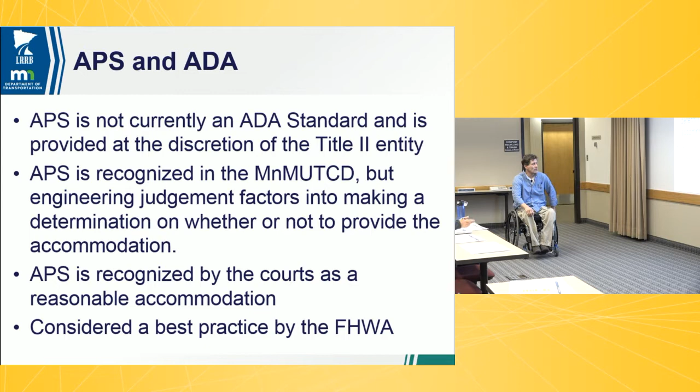It's not required, you don't have to do it. But APS is recognized by the courts as a reasonable accommodation, and it's considered a best practice by the FHWA. And the Access Board, who makes the regulations, the standards, their position demonstrates APS is viewed as a reasonable accommodation for blind and low vision users, and APS will be included in the final rule for public right-of-way.

So there's a few things going on there - actually MnDOT had a small complaint filed against us, but it did go to Washington Department of Justice and the St. Paul FHWA, and the basis of that was we were not doing APS. So visually impaired users rightfully said, you know, I don't know what this signal is telling me. It's not communicating the same language, the same information, so it's not accessible.

And, you know, what could we say? It's a very hard case to say it's not, or say that it is accessible. So it was determined that we weren't going to win that. So part of the outcome of that was we just basically said we are going to make APS a standard as we do improvements. And actually that's where my position started in my unit. We started amping up our engineering side of accessibility, and this was in 2010.

So also, where we said APS will include it in the final rule for public right-of-way, the Pro is actually a new version of PROWAG. It's public right-of-way. And they've got language currently in PROWAG that says that you will need to upgrade APS as something as simple as a timing change, which would be a big difference. You're not even doing construction, you're just doing signal timing change, and you do have to do APS. But when that switch gets flipped, that can be very drastic.

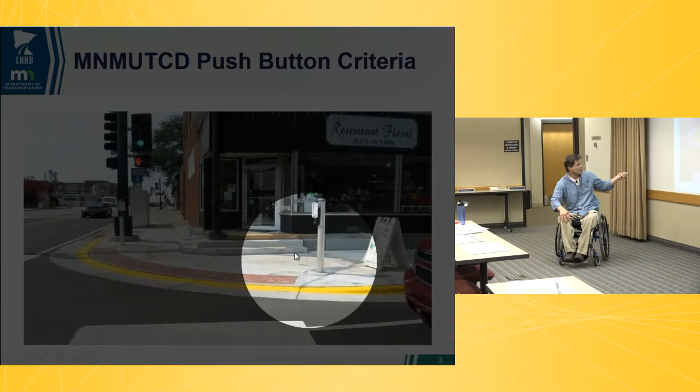So the first slide we have is a typical type intersection, with APS installation. It's got two push buttons on it because there's two crossings. So you always want to have this outside push button on the outside edge of the crosswalk here. Again, this one over here is on the outside edge as well, as you can see. So I use my hands here. But it's always off this outside edge. And so there's one push button for each crosswalk.

The push buttons always need to be adjacent to a landing, so users in chairs can be on that relatively flat surface and activate the push button. The push button also needs to be 42 inches high, and that's actually just a MUTCD standard that's been there for quite a while. It's a traffic standard.

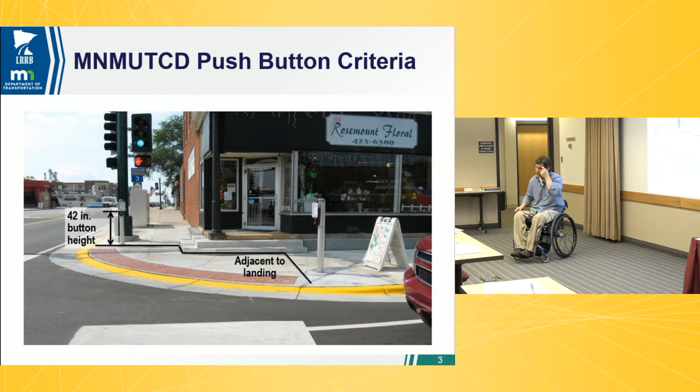ADA actually gives more flexibility, saying it can be anywhere from 15 to 48 inches. But in this case, consistency is important in a lot of things, and our standard is 42 inches from our traffic folks. Also, you need a 10-foot minimum button separation.

That is so users who are coming up to the intersection have the locator tones. These push buttons beep 24/7 just in the vicinity of the quadrant itself, so visually impaired users coming up here, with one crosswalk for this leg and one crosswalk for that leg, can use that 10-foot distinction to tell which button is for which crosswalk.

Having two push buttons on the same pole is very confusing for users. What is this one pointing me here? Where is this one supposed to be pointing me? So consistency is really important, and we'll keep hitting on that.

Also, the push button needs to be no more than 5 foot offset from the edge of crosswalk. That's because some users do depart from these push buttons, and if you're located away from the crosswalk and depart from the push button, you could end up in the way of those queued vehicles.

Users use them differently, but some users will depart from the button and even line themselves up perpendicular with the sign, so when the audible message comes, that's where they're going to go. Other users will just leave from the tapers or the domes, but for users that leave from the sign, it's really important to have that location set.

I've been talking about visually impaired users quite a bit, but there's also another function to the APS, and that's the vibrotactile push button feature. That is for users who are both deaf and blind. They're not seeing the cues or even hearing the speaker, but they're sitting there at this push button waiting for it to vibrate, and when it vibrates, they will start their crossing and go across the roadway.

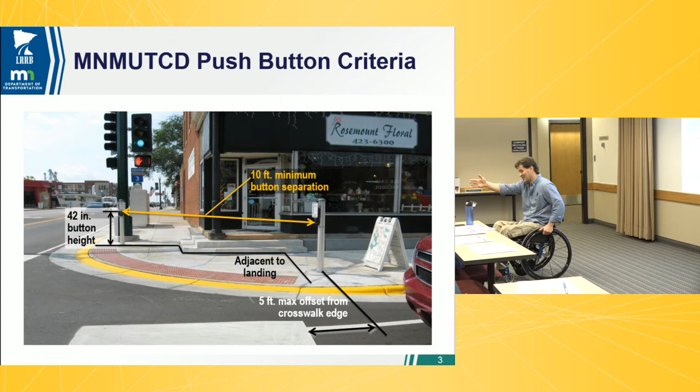I would still say that is courageous, crossing some of our high-speed roadways, but users are using them this way. So it's very important that we design these things correctly. It takes a lot of faith, because that's what they're saying. You've got to design them right.

You've got to build them right. They've got to be maintained right. So they're counting on us as individuals to make that happen. So the details do matter.

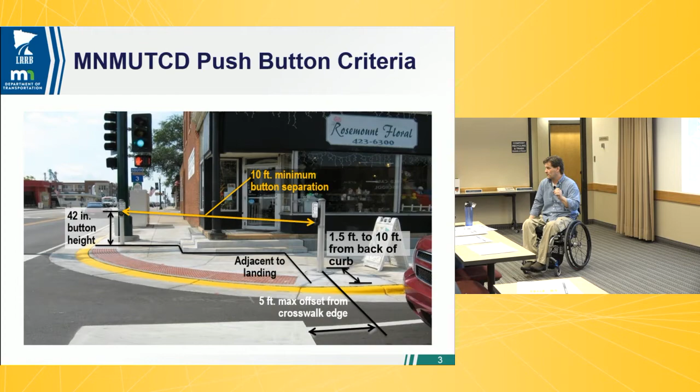Then finally there's the push button setback. It's a minimum of 1.5 foot from back of curb. The MUTCD talks about it should be up to 6 feet from back of curb, with exceptions up to 10. But MnDOT is using that full exception quite often because we're in a snow and ice climate, so we're trying to get this push button outside of the middle of our walks for maintenance purposes. So we're going 1.5 to 10 feet maximum setback from the back of curb.

There are other additional MnDOT requirements. Those were all MUTCD requirements, but at MnDOT, whenever it's on an individual push button station, we want that to be a minimum of 4 foot from the back of curb. That's simply for knockdowns, overturning vehicles, snow plows — we don't want those to get knocked down. So we want them to be at least 4 foot.

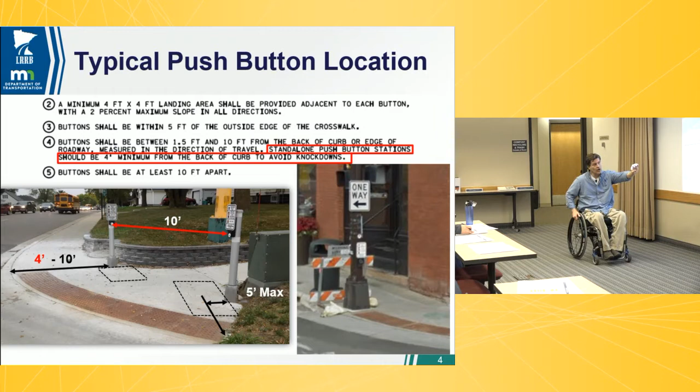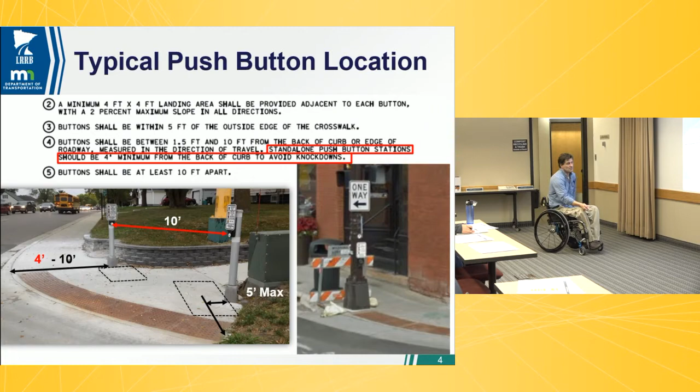When you do need to put a push button on the pole, as in the picture on the right, that is fine to put it right there. This one's actually compliant — it's probably 1.5 foot from the back of curb, and that pole is not going to get knocked over, so that works well. This is a tight corner; you weren't going to be able to do anything else in that area with that minimal space. So using the push button on the pole is fine.

So now that's a lot of criteria, right?

I'm really limited where I'm going to put these things, and I want to meet all these standards, which we definitely want to do. But also, we don't want these push buttons to be in the middle of our sidewalk. So we've got areas with 2 grass boulevards. Whenever you can get boulevards for ADA, do it. It makes it so much easier. There are so many benefits - the design and construction is better, and the pedestrian environment is better. So boulevards are huge.

So when we have boulevards, we generally are able to favor our push buttons towards the front of walk, in that 6 foot sweet spot we talked about earlier. You can have a landing, a ramp, and a landing, and the push button all in line with this front edge of walk, which actually works real well. Same thing over on the right side, in line with the front of the walk. It's a tough push there, but it works well in that type of situation.

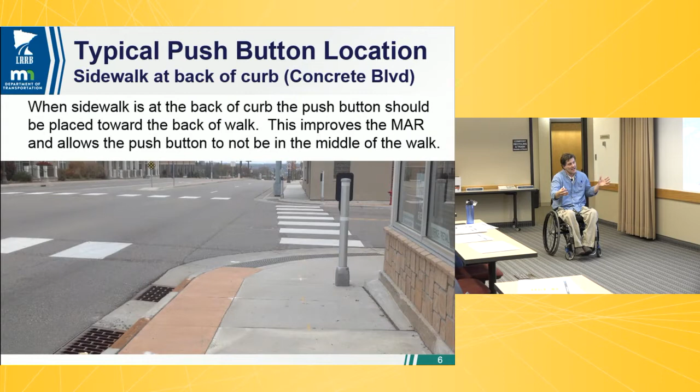Now, when you've got a full width sidewalk, we generally favor the buttons towards the back of walk, just so the buttons aren't in the middle of the way. If we put the push button, say, right here in the middle, it can block things up. So we're trying to avoid that.

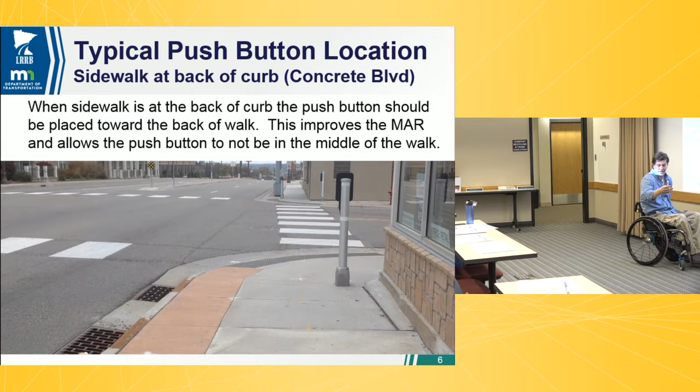Every intersection, the geometry is a little bit different. Here we have 2 individual ramps, which works great. But on the right side, we've got a boulevard coming in, so we could favor the front side of that walk with the push button at, say, 6 feet back. This side on the left is a full width sidewalk, so we align the push button with the back of walk. So both fully meet standards, and they're out of the way of the walk.

The additional benefit of this is when you have this front-to-back stagger, that actually helps you get that minimum 10-foot separation, which helps a lot sometimes. If this was pushed more towards the back of walk, you'd have to widen it out to get that 10 foot of separation. So there's a lot of little tricks you can do, just knowing how to fit the criteria in.

So we'll talk about maintenance access routes.

Question? Yes, quick question before we move on to maintenance. I was under the understanding that in addition to the push button location and that 10 feet separation, the push button is actually directed in the direction that the crosswalk goes, so they can line up with the direction of the push button.

It does, yes. You either didn't mention it, or I didn't mention it. So yes, the users are getting the exact directionality out of this. It's lining up with where they're supposed to go, and that's what I was talking about - square it up with your arm, or using your palm for the vibrotactile feature, and that is guiding you exactly where you're going on the other side. Of all the design elements in the quadrant, the push button would be best for giving directional location of the quadrant. Yes, that signals it. It's really hard to make the ramps directional, I'll show you that, but the push button is a great technique for giving directionality for visually impaired users.

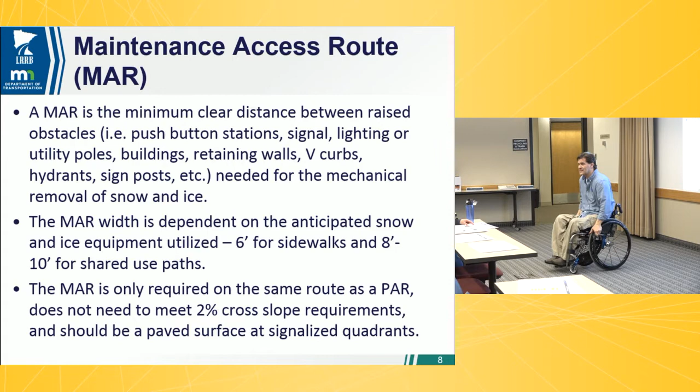Any questions on the PAR and the MAR?

Okay, so here shows a picture of - we definitely have that 6 foot clear from the edge of the T-base to the face of the building, so that's what we want. Here's the other thing that MnDOT added: if at all possible, we want 2 foot back from the top of ramp to put the push button.

Now, all PROWAG says is you need to be adjacent to a landing. So I can have that push button at the front of the landing, the middle of the landing, or the back of the landing. There's certain areas that are better for usability. Right in the middle is what I shoot for.

So, for example, I'm a para and I've got pretty good strength, but I do have balance issues. So as I start reaching forward here to hit this push button at the front of the landing, I'm holding myself up with my hand here. And if this hand isn't here and I start reaching farther forward, I basically fall over because I don't have use of my legs. You guys are all using your legs to sit up right now - you might not know it, but that's what's holding you up. If you don't have those, you'd have a lot of that balance issues.

And again, there's other people with higher impairments than me that have a hard time even reaching forward to where our button is. So having that centered is a very big usability thing.

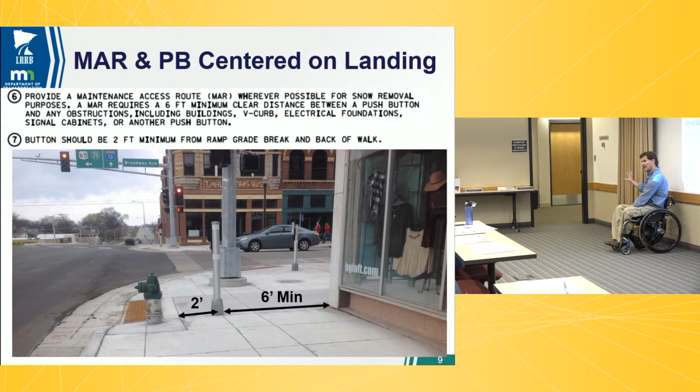Also, as far as if the button - let's say this carpet is the back of walk, and that button is back here, right at the back of the walk - much harder reach here. I'm torquing around pretty good, and I've got a lot of fusion going on here, so that's a hard reach. So again, if we could just add 2 more foot of sidewalk behind that, where this button would line up again and be centered on that landing, much better from a usability standpoint.

So yes, that's MnDOT's 2 additions. And something does have to give, we get that. So when push comes to shove, we're going to use the maintenance access route over centering it on the landing. But again, we can only have it 0.75 feet - I'll show you that in a minute because we have an integral base - so it's got to be that 9 inches minimum back from a landing.

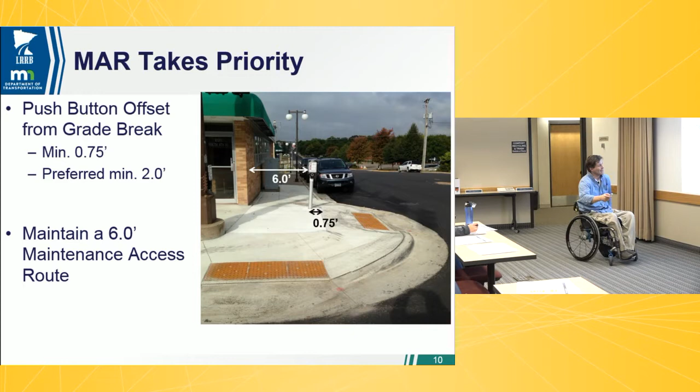I can just slide this push button back out of the way and it's easy, still meets standards, so everyone's good, right? No, not what we wanted. The business folks in the community said, what are you doing? You just ruined our sidewalk. Our project team said, well, it's compliant. Does that matter to all the other users? That's right in the middle of the walk. You talk about maintenance, not going to happen. Two people walking down the sidewalk, it's a hazard, or a kid on a bike.

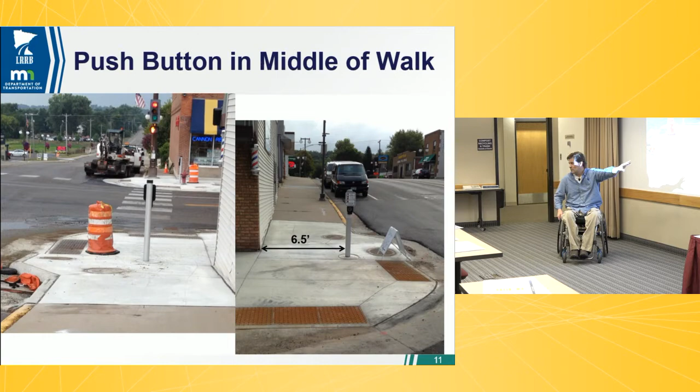So actually, we went back and had the contractor put the push button where it was supposed to be. He dug around the conduits, got that 6 foot clear, got a wide 6 foot pedestrian access route. So you got your maintenance access route, you got a wider PAR, more usable, still meets standards. Both of these are compliant, but obviously one gets you better results than the other. So don't always dial down to the minimums.

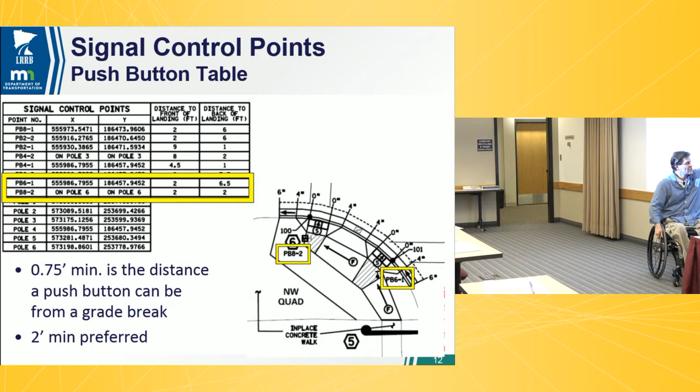So we've talked about how to put all the plans, the quadrants together. Now we want to show how it goes into a plan set. This is one of your example sheets. You've got a plan sheet for this, and basically this talks about where to put the push buttons on the landing. The one on the right has a 2 foot setback and 6.5 foot behind it. That's what our landing table talks about: 2 foot to the front, 6.5 foot to the back of the landing. We're describing this for a contractor so he knows how to build these landings.

I should have backed out even farther, because before we used to have signal plans that were basically schematics, and it was just like field people, go locate your signal components wherever it is. It rarely worked out with ADA. So we're starting to detail these together, and we've got the same push button nomenclature for that as a signal phasing.

We've got XY coordinates for the new signal components, because there's always a question - if MnDOT says mark it here, someone marks it somewhere else. We want to have that record of where it is, and we want to have it thought out where that pole should be. There's an example of where it says 'on pole' for an existing pole - we're not giving coordinates for that, because that's obviously going to stay where it is. But we are also describing all those XY coordinates in this landing table.

That's what I was getting at with push button PB6-1. You can see there, you've got the 2 foot from the front of the landing, 6.5 foot to the back, so you get that 6 foot maintenance access route, so you're good. The push button on the left, PB8-2, is at the end of the sidewalk, so just 2 foot to the front, 2 foot to the back, centered on a landing - very understandable.

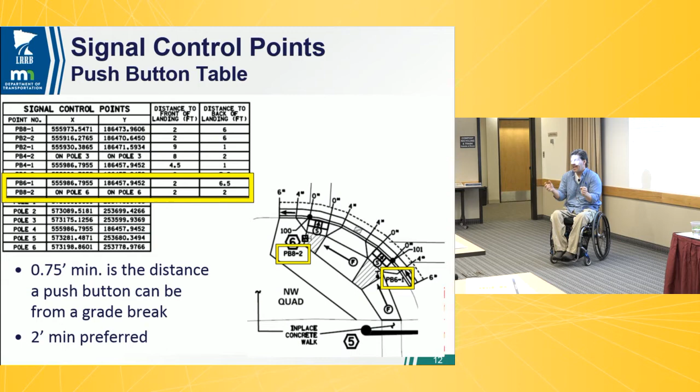I would like to mention, if you're ever going to extend sidewalk in the future to that left side, you're probably going to end up reworking that landing. So know what your whole configuration is if you want to avoid that rework. Even more important, if you only put in one crossing or one push button and want to add another later, you're obviously always going to have to build that other quadrant. But even the quadrant you came from - going from one push button to two push buttons - is quite often going to need to get reconstructed because you have a different set of constraints. So think of what your whole system is as you're designing these.

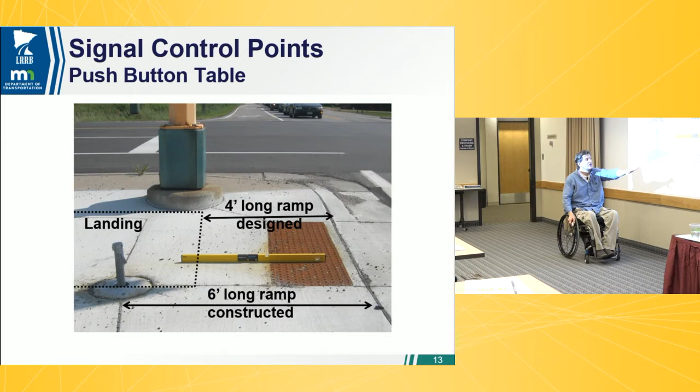Here's a picture of what a contractor did. We called for a 4-foot long ramp with the button centered on the landing. The contractor built a 6-foot ramp. It was clear it wasn't what the plans called for, so that one was rebuilt.

So there's a lot of things at a quadrant, especially a signalized quadrant. The first being the turning radius that's minimizing your space, and that's where your cabinets are, your poles. I'm talking push buttons, but you've got hydrants, signs, curb ramps - so a lot of stuff. So we're saying often you need to get more room, period. So we're using these types of footprints.

We had been using it in our detail design because we hadn't been designing them out far enough to allow the right-of-way process. We're using these as footprints for the pre-design. But also, even in our scoping process, we're using these now.

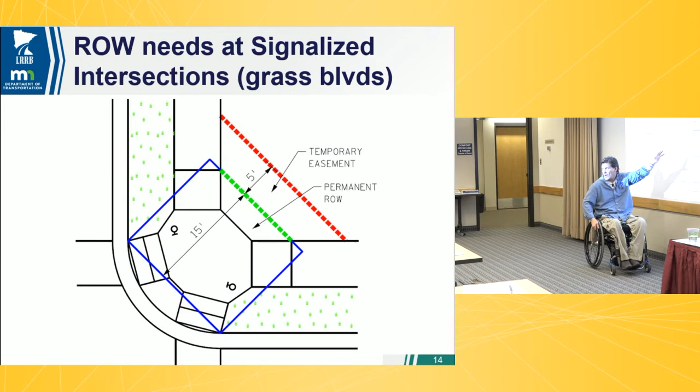So we want to make sure that we're starting at this outside zero and going back 15 feet. In this configuration, we've got the push buttons at the front of walk, so again we're about 6 feet back. Get a good 6-7 feet behind that, get that permanent right-of-way, so you've got the footprint you need to get these buttons in here.

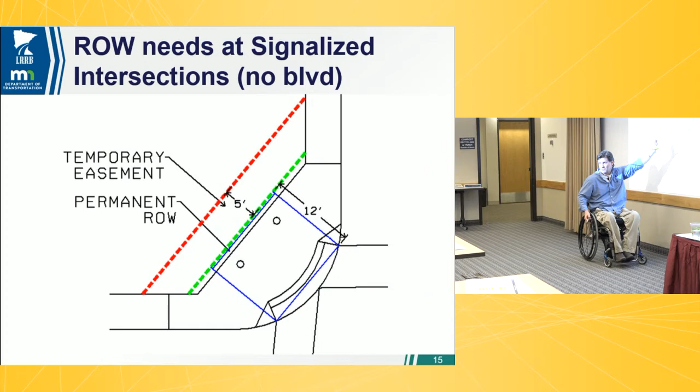There's another setup where you've got the push buttons favoring the back of walk, 10 feet, add 2, so you're at 12 foot permanent right-of-way. And again, always get that extra 5 foot of TE for construction purposes. But again, these footprints are often too small to get all this to work, so we're starting to acquire that on our projects.

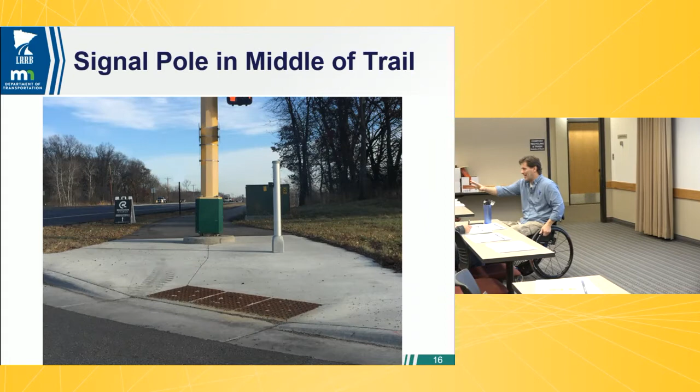And again, this isn't APS, that's actually just a solid state push button on a pole, and then the big mast pole in the middle. But all kinds of issues with this, and this is near my home. So I'm on a hand cycle going through here, and my biggest fear is not the left turning cars or the right turning cars conflicting with me. It's how am I going to get through that maze on the other side, where we're lining up all these obstacles and my bike doesn't steer too well.

But I'm not saying you have to design it for me on my hand cycle, but that same thing is there for little kids on bikes weaving through here. Visually impaired users, not good. But the obvious thing - how is this ever going to get maintained? You're going to have your plow truck coming down the other side, your pickup, 8 to 10 foot wide. He gets here, jump the curb, get out your shovel and shovel this area? No, neither one of those are going to happen, too likely. So even if you're not doing APS, strategically think about what we're doing for the future here and why that needs to be in the middle.

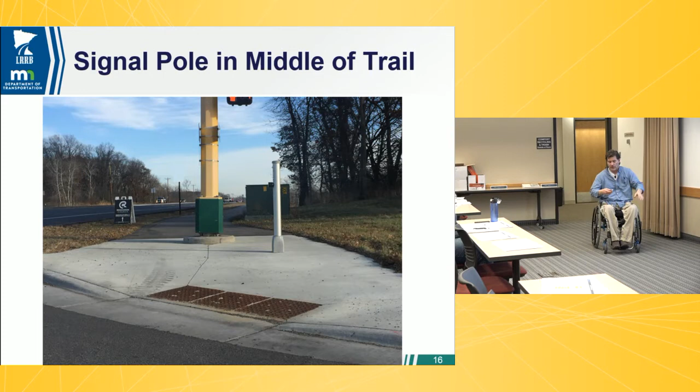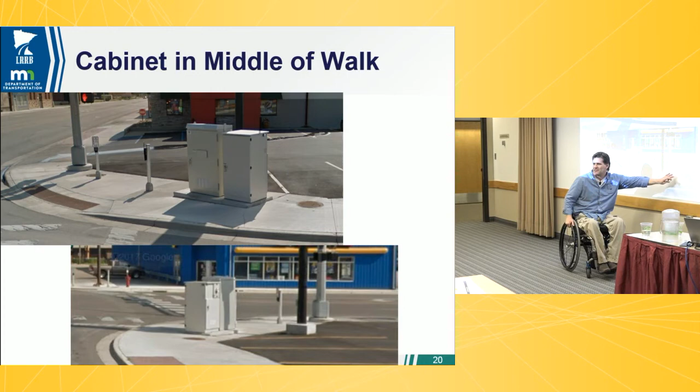And now looking at hindsight, this area over here—we bought the footprint I was talking about, but there's this remnant area over here. We already acquired the right-of-way. That would have been a perfect spot to put that cabinet downstream. Again, that's not even a parking area, it's kind of a remnant piece. So the ideal location would have been that, in hindsight.

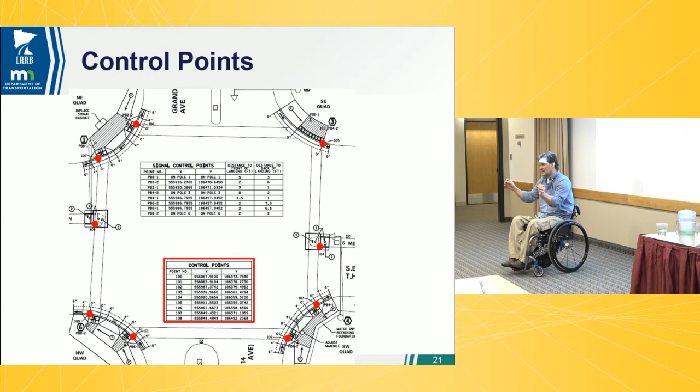So again, that is an example plan. You have the handout of this—it's on our website. This is basically how we've been doing signals for the past 5-6 years. This is that coordination drawing, 20 scale, hopefully if it all fits, maybe 30 scale. But everything we talked about is on that plan. So that is required whenever you're doing ped ramps at a signalized intersection and APS on MnDOT right-of-way.

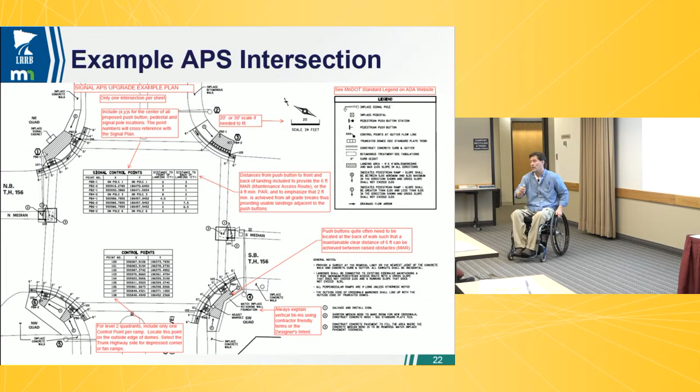Often the first person there is the guy on the directional boring unit, and he'll just go in here and say, this looks like a good spot. He'll pick the worst area, the prime location, and that'll change the whole design, and you're scrambling from that point. So again, show where to put the hand holes so they know where the good locations are.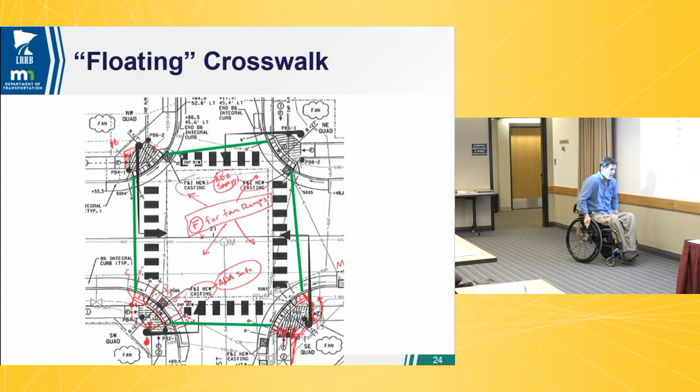The first being where we're potentially skewing the crosswalks. For example, this one, we want to keep pretty close to the intersection because that's where vehicles stop, the stopping side. It's really critical where cars stop so they can see both ways. If we move this crosswalk too far back, vehicles will pull onto it.

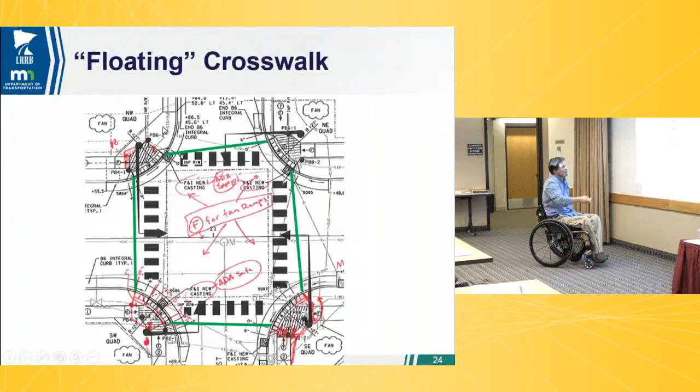This is what I call the downstream crosswalk over here. There's a lot more flexibility since there's no vehicle stopping here, so I can float this one and get more separation for that area. We did that in this upper area as well, holding this side for the stopping side and floating the downstream side around the corner. We'll blow it up a little farther and talk about our recommendations.

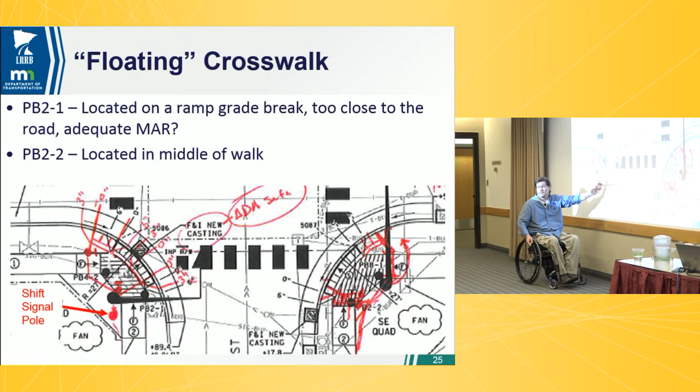This picture came in calling for an S-fan with a catch basin in the middle, but more important, there's a push button right at the front of the walk, at the top of a 3-foot ramp. It's within that 4-foot area where things are going to get knocked down, and it's also not centered on a landing—if we did that, it'd be in the middle of the walk.

So basically we're saying, let's try this one at the back of walk. Lining up, it'll still meet good standards there. But once we move that one to the back of walk, we're too close between this and that other push button.

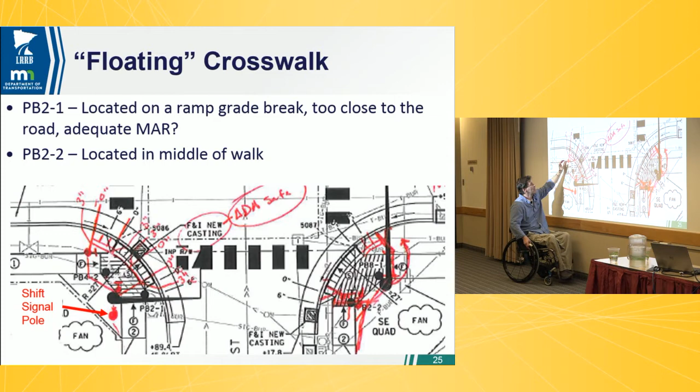So we actually move this push button up to the front of the walk, and by extending these domes maybe 4 foot, we're able to find a 6-foot boulevard area—a 3-foot ramp, 5 to 6 foot push button—so we get more room to put that push button. It works real well, it's outside of the sidewalk and meets all the push button requirements.

Also, this big, large signal pole is likely real close and could cause problems, because when you're constructing the base, these things are 12 feet deep, 3-foot diameter, and our utility locates are kind of iffy. You don't really know until you're in the field where things are, and that can really screw up our design. So we're playing the odds here.

Let's get this big signal pole out of the way—just shift it in line with traffic so it's the same mast arm length, and get it out of the ramp area. We already had right of way here, and if this thing moves 2 or 3 or 4 feet, it's not going to affect your ADA design. The traffic folks will just worry about what they have to figure in.

So again, a lot of variables here, and you can see why it's kind of an iterative process—I've probably listed 10 different APS criteria at this point. What's frustrating is this came in at 90% and we had it all figured out finally after the iterations. But the design came in at 100% and the sidewalk that used to be here was now at back of curb. It's like, oh, come on. Basically we're starting over—you've got a new set of constraints, a new set of assumptions, so you start that whole process over again, which is obviously frustrating for the designer and for us as well, but even the designers don't always understand that there's an interplay of all these criteria.

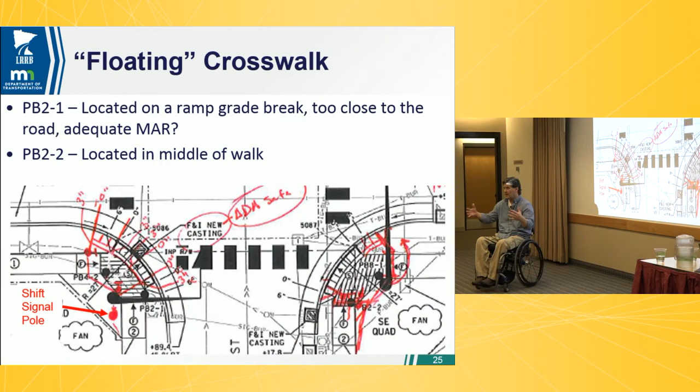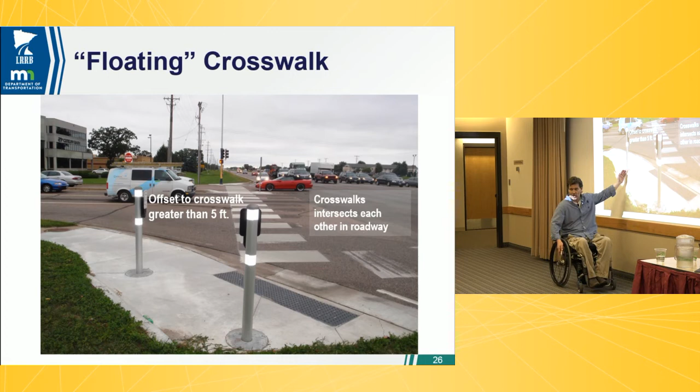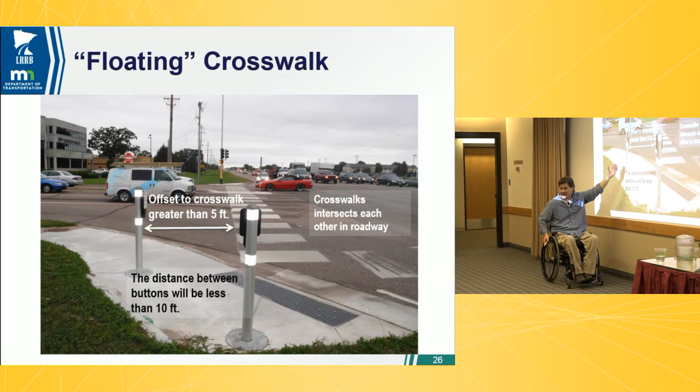So looking at this intersection, it's an older intersection. We installed this push button correctly within 5 foot of the outside edge of crosswalk. We had our 10-foot separation, which is good, but when your two crosswalks are on top of each other out there in the middle of the road, you're generally not going to get it all to work because you're going to start exceeding that last 5-foot setback area. We could have moved this crosswalk back here, but that's the stopping side where vehicles are, and we want to keep this one generally closer.

So we think it would be better to shift these buttons this way, and move this downstream crosswalk to get a more balanced effect without impacting the vehicle stopping area. So we'd like to show this one.

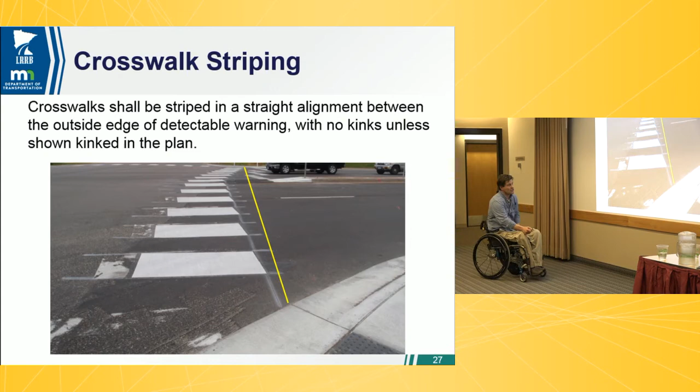So some of the finer points there, but those are huge things to start your design with—some huge assumptions. This is an intersection that Annie was talking about in the earlier video, and we were able to do some good best practices for her.

We grooved these outside edges of crosswalks—basically just pavement striping grooving without the striping—so she can use her cane and get right across that. We also did that in between the curb ramps so she could have better wayfinding.

Previously, she navigated around the circumference of the pork chop because that's where she found the curb line to find the next curb ramp. So this is again a much better, very simple type of improvement.

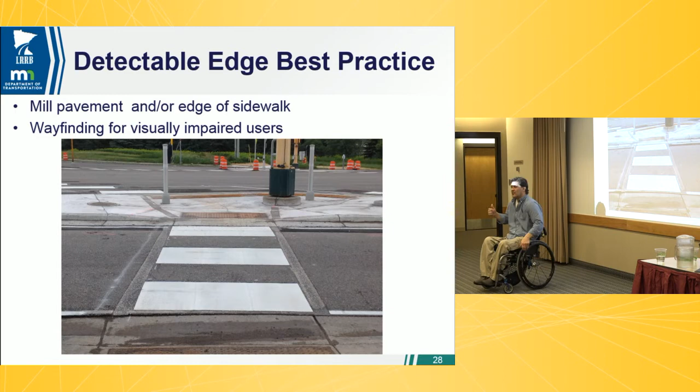This would work well at non-signalized intersections too, skewed intersections where it's hard to have that direction of travel. We offered this at a project by the school for the blind in Faribault—they had one of those tough non-signalized corners, and we said we could make this a lot easier by grooving a stripe you could track across the intersection to end up right where you want. It was a little interesting, but I get it.

They said, nope, we don't want that because that would be too easy. Go do that everywhere else, make it a standard, because that's what we have to deal with every day—don't make it too easy for us now, because we have to learn how to deal the hard way with everything that's been built for them up to this point. Kind of an interesting thought.

Even some of these practices—this grooving is pretty simple. A lot of times we'll say we want to do V-curb and channelize things, which again is harder to design, harder to construct, harder to maintain. So some of these low-cost ideas, I think, have a lot of potential.

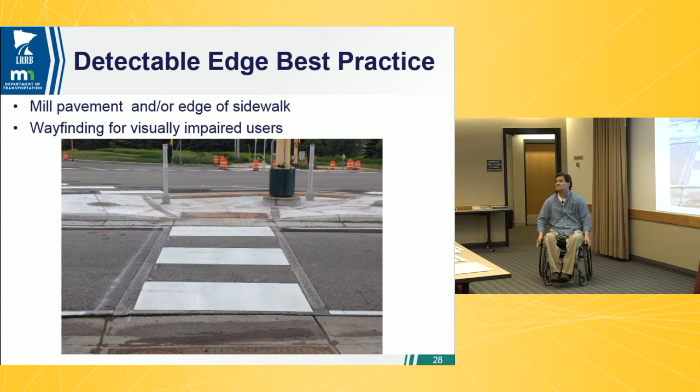What's maintenance like? Snowplows aren't catching them or anything? No, this is just simple—it's just like pavement striping, same as if you had a crosswalk grooved or anything else. So yeah, nothing. Yep.

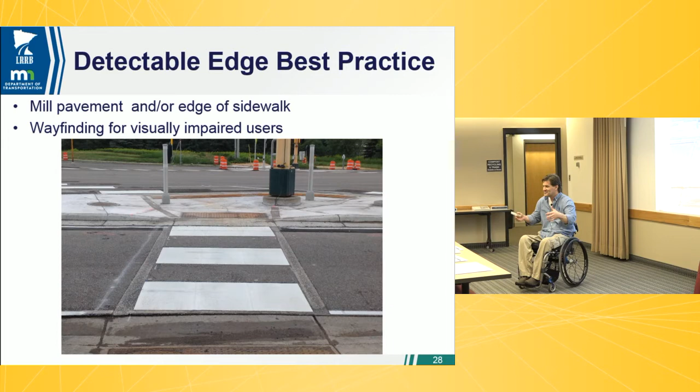Talking about pork chop size makes a difference as well. We use a lot of 4-inch curbs at pork chops because that theoretically reduces the ramp length by 2 feet already versus a 6-inch curb. But we also want to have good footprints in here.

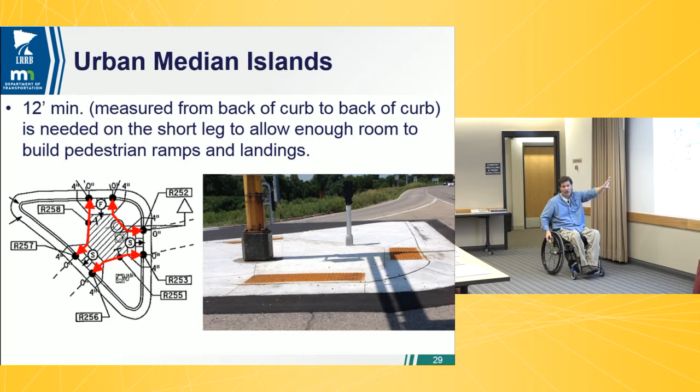These red lines show where you've got a 4-foot ramp, a 4-foot landing, and another 4-foot ramp. You need a minimum of say 12 feet in all those red line areas. That's a good-sized pork chop in the picture to accomplish what we're talking about. But the alignment of the ramps is also very important—the one on the left is pretty logical because all three of the middle of the ramps come to one center point.

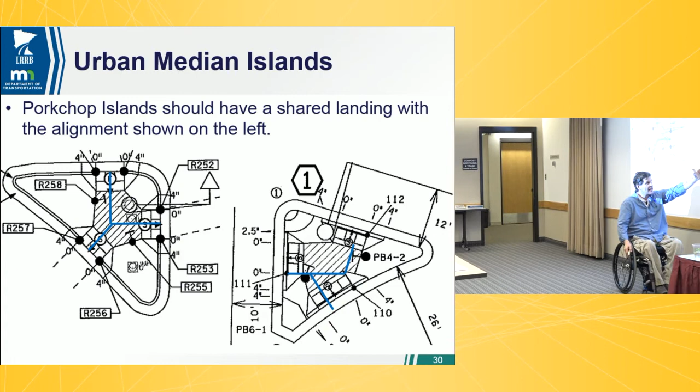So it's real intuitive where to walk, even for maintenance. This one on the right, there were some utilities in the way that required a signal pole, and that required these curb ramps to be offset. So this curb ramp comes into the side of the push button, and it doesn't flow well at all.

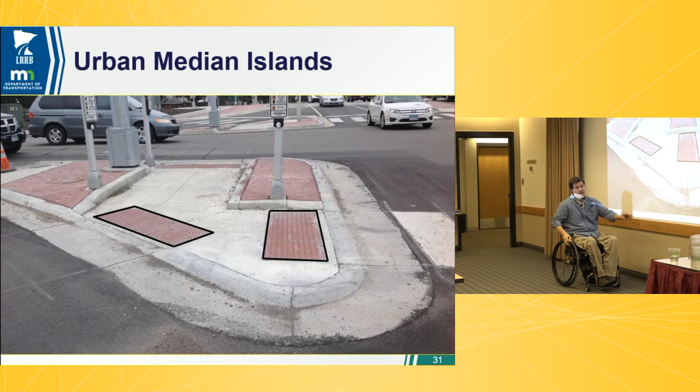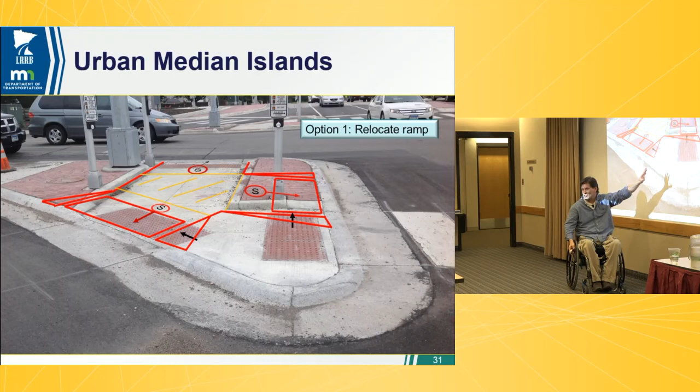But look where that crosswalk location is, where that striping is. I contend there's no reason that striping needs to be there. If you just decided to move that crosswalk 6 feet up where these ramps could be more centered, all coming together, it's equilateral. I've got 4 foot everywhere now. I can come to a common landing and everything works really well. I don't have the V-curb and all that. So just a simple location change of one curb ramp can change it significantly.

And to be honest, there is a 3rd push button here. So to get this one at a landing, we likely would have had to make this 2 foot bigger on this side to be part of that push button. So again, geometry and location both matter.

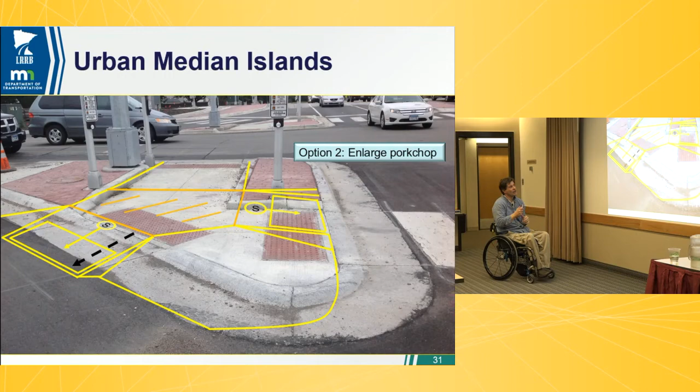People still will go there, they still will cross our highways. So we want to make sure if there's destinations, we're meeting those pedestrian needs. And once the crosswalk locations have been determined, we want to make sure they're accessible from an ADA standpoint. Because sometimes the biggest barrier is just crossing our highways, for sure.

Because a lot of you folks will navigate up the grass boulevard, I'll navigate up the shoulder, whatever, I'll get there. But the highways are difficult and dangerous. And even when we've got a wide highway and we just rely on vehicle time, sometimes the minimum green time is like 12 seconds. You are not going to get across that intersection in 12 seconds. So just having that pedestrian phase is important as well.

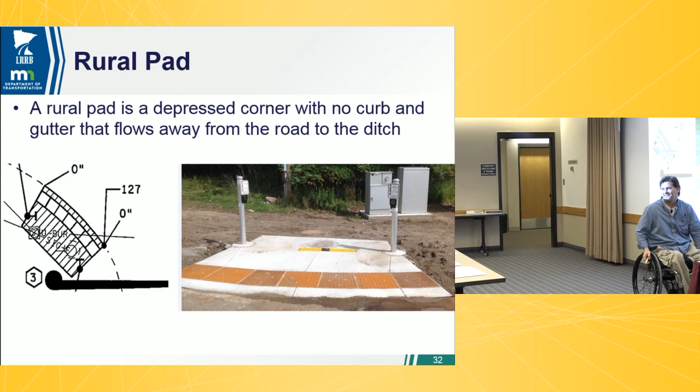Since you're going to have the grass boulevard right next to where that APS push button is, preference is to carry the concrete a little further so that the users using the APS have a directional path, they're not crossing from the concrete to grass. We're starting to do that, extending our domes so you've got that full concrete width in the crossing area, just like that walkable flare would have been. Extending your domes would help that as well.

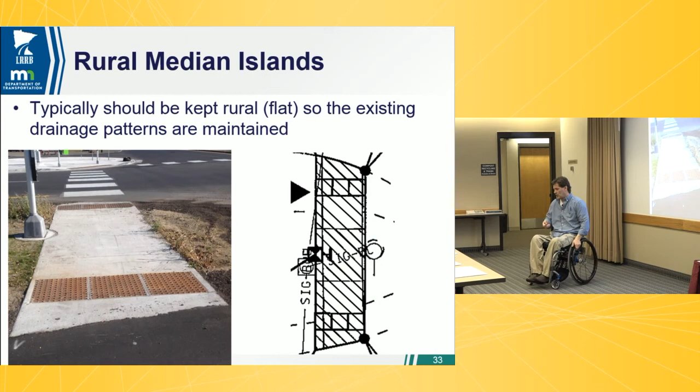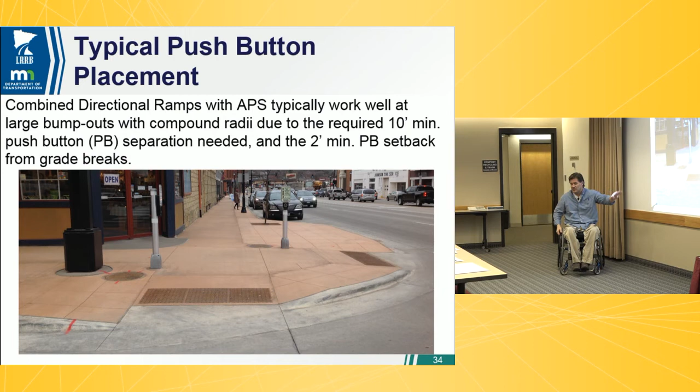Here, we hinted at this earlier, but this is a good install, APS with directional ramps. Everybody wants to do that, and I'm fine with it. It's good if it works, but it takes a lot to get this to work. I like to show this one. To get a directional ramp here on this 6 foot wide, needed about 3 foot of directional curb. Then we've got about a 4 foot ramp. The button 2 feet back from that, we're at 9 feet. That's kind of that 349 I was talking about, but this one's actually directional.

But anyways, we're back at 9 feet. We haven't had the PAR come through here yet, and we start talking about a 6 foot PAR behind here as a kind of minimum. Now I'm at 15 feet. That's a wide sidewalk, we don't have a lot of 15 foot sidewalks. So if you want to get directional ramps with APS, quite often you do bump outs like shown here. That'll allow that to happen. Again, the sidewalk lines up well behind both push buttons.

I also like to point out, if you didn't do that bump out, if you just had 6 foot ramps here with a push button over there, at the edge of this landing, you will never get 10 feet of separation on a 6x6 landing. So you need those to be separated apart. That's another reason it's hard to have directional ramps with APS, but it can be done, and it can be done well.

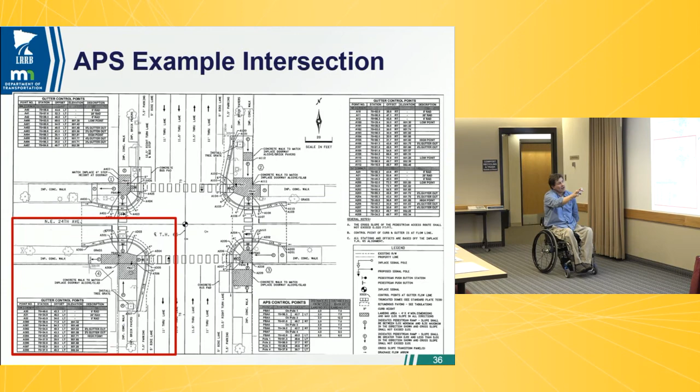And again, we've got a bank area where we got to tie into, so that's going to be a doorway match. Here's a picture. We did a lot of bump outs here. The city kind of wanted to go with larger bump outs.

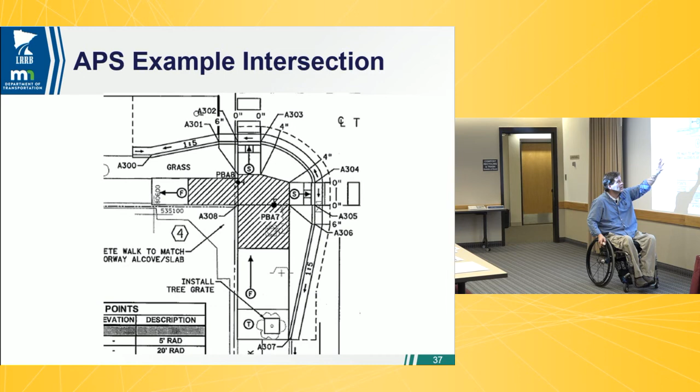We'll look at one corner in particular. Here is a full 6-foot bump out, tangents in front of the ramps through the flare, compound radii, but a real good design. All landing areas and push buttons met the requirements.

But these designs look a lot different than those non-signalized designs. So APS ramps are going to be different criteria, and there isn't a lot of actual national guidance on that. Like I said, there's a lot of guidance on how to do APS, a lot of guidance on how to do curb ramps, but there's not a lot about how they fit together. So we've done a lot on that as an agency.

So I'll go through a few other things that the traffic office has worked with us on. They've made a lot of really nice improvements that make this task easier.

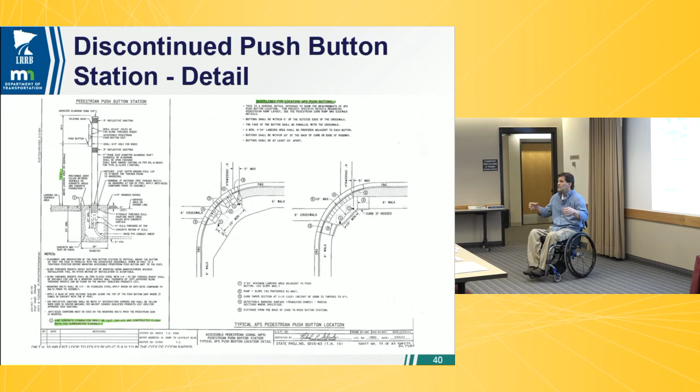So a little bit of a history lesson on our push button stations. We used to have this detail, which was a precast base that the contractor would just kind of rough in the conduit, guess on an elevation, and it was supposed to be within a quarter inch of the sidewalk. Never happened. So we started to modify that and said, well, no, you have to use a sonotube. Rough in the conduit, have a sonotube there for that foundation, pour your sidewalk, and then cut your sonotube off and pour your foundation second, so you know it would be flush.

I'm going to talk about that a little later, but that's part of the evolution. And again, this is where we were guessing wrong - trip hazards and whatnot. We were also getting some issues here with differential settlement between the foundation and the 6-inch walk, 12-inch deep foundation, so there'd be shifting at different times of the year. So we wanted to come up with something better.

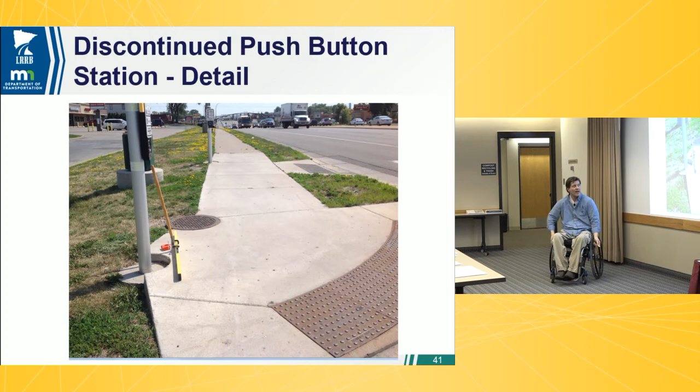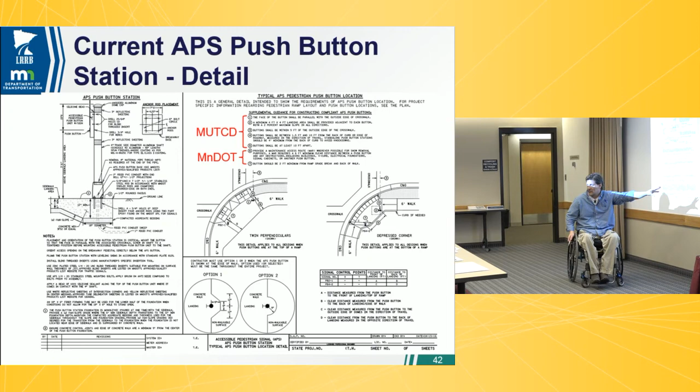And again, this is the new detail. You have a handout of it, and it shows our new push button on the left. I'll also point out that criteria - this is on all plan sheets that have signals. It's got the MUTCD criteria, MnDOT criteria, how to locate the push buttons that we talked about earlier, landing table, and details on how to finish off the foundation at the edge of walks. But we'll look at this signal, the detail for the left.

Here, instead of having a separate base, it's integral. So we have an 18-inch diameter, 12-inch deep, thickened sidewalk, tapered out, and we are epoxy anchoring in 4 bolts, and that's our foundation. So it's an integral piece, works really good. It's obviously always flush, less coordination between the contractors. So it's a really sleek design.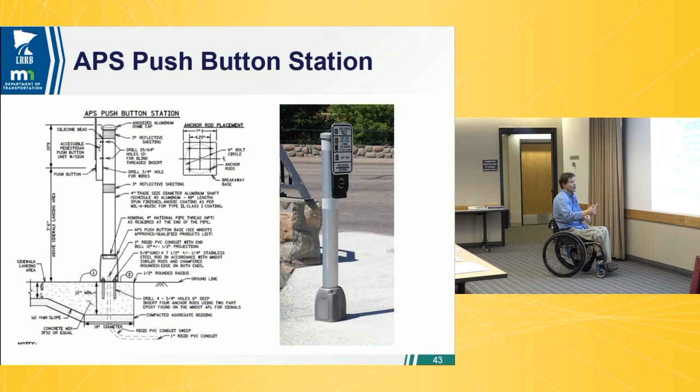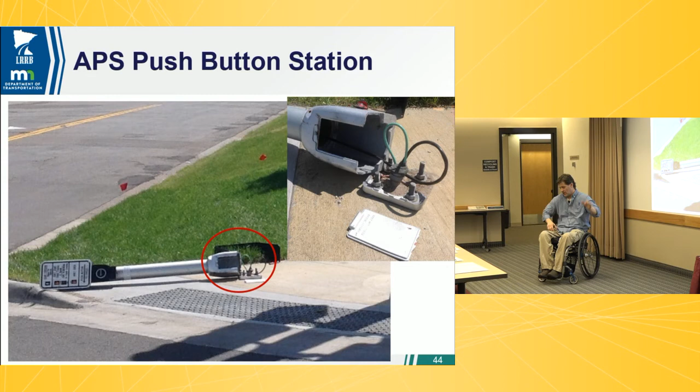Again, we used to have bases that were 2x2s, concrete sticking out - some agencies did - and it was really hard to get ADA compliant. So this is a much sleeker base that fits into these tighter areas, and maintenance likes this a lot as well. They break where they're supposed to. Before, right on the T-base, it used to break into the concrete foundation, and electricians don't like doing concrete, especially in January in Minnesota. So again, very nice improvement. Maintenance is liking this a lot, and yeah, so it's working well.

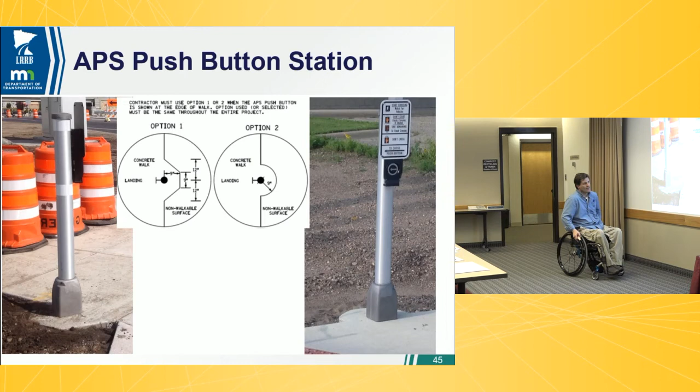So that's a 9-inch diameter... 18-inch diameter, 9-inch radius. You want that thickened edge, so if you're at the edge of the walk, you would thicken around the outside. There's 2 different details on how to do that. Also, even inside the walk, you don't want those joints to be anywhere in that 9-inch radius. So you want to make sure all cold joints, saw cuts, or any contraction joints are outside of that radius. So again, that shows this detail on how to do that.

And some of the devices that we had - before, we'd put the push button on a signal pole, and there were some limitations to that, because we have octagonal signal poles, and we're supposed to direct people exactly where to go, but our poles are like 0, 22.5, or 45 degrees. So we had to find a way to start shimming that to get a little bit better direction.

There's a 10-inch maximum horizontal reach to reach the push button. If I'm up at the edge of the foundation and we put it on the signal pole, we were right at 9.5 inches, so we were compliant but starting to be at the edge of it. Now in Minnesota, you throw a snowbank there, and now you're at 19.5 inches, real easy. So again, it doesn't meet standards. We're seeing what we can do to make that more usable and reachable.

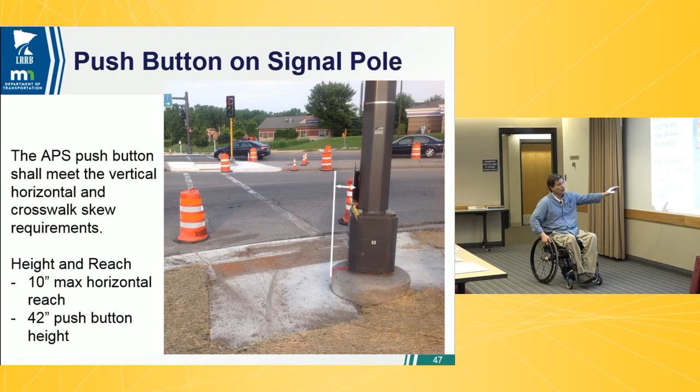Also, there's that 42-inch button height we talked about earlier, so again getting that height consistent. So there's some challenges, and we came up with this pole mounting adapter, which works very well.

We are able, on the picture on the right, to tap into this round tube to get the directionality we want. It shims it out a few inches, about 6 inches, so you're less than 2 inches from the edge of the foundation. Also, you can adjust the height on it. Before, to be 42 inches, you would be bolting right into that flange. Can't do that. Also, Millerbernd won't let us tie into the T-base, so we're really restricted.

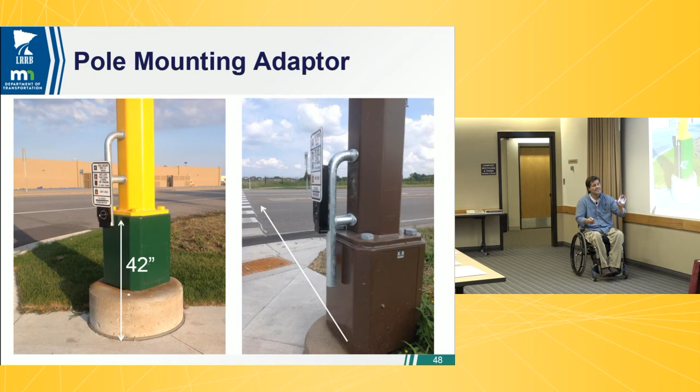Before, this foundation actually had to project 6 inches for traffic standards, but no more than 8 inches for ADA standards. And this big thing was augered in before any sidewalk was in, maybe even before the curb was in, so it was really hard for a contractor to figure that out. This adapter gives a lot more freedom for that. So a really nice innovation working with our traffic office.

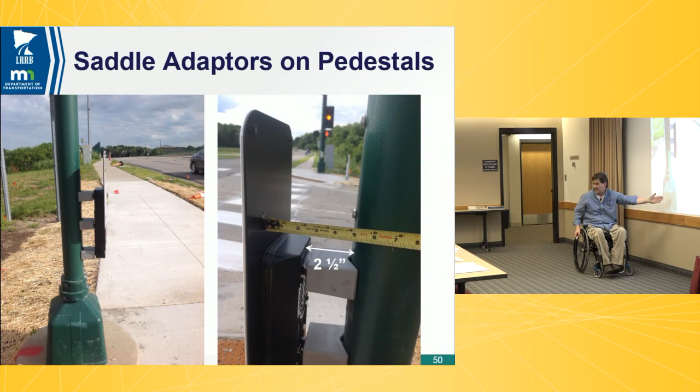Also, pedestals, same thing, reach distance gets violated. This is a 30-inch diameter foundation, 4-inch pole, so we're always over 10 inches if this is projecting. So we have a saddle mount adapter, this 2.5-inch shim on your right. You see the three things over here, two for the bolts, one for the wire, shimming that out so it is in line with the face of the T-base, which reduces reach distance. And a couple details in our plans show you how to mount those on either the pedestal or the signal pole, either of those adapters.

The pedestal base is important as well. This was always supposed to be within a quarter inch flush, as in this detail off to the right, and that is because of traffic standards. Our bolts project 3 and 3/4 inch, and NCHRP says you shouldn't have more than a 4-inch projection on a breakaway pedestal like ours. That's so gas tanks don't puncture and are less likely to erupt.

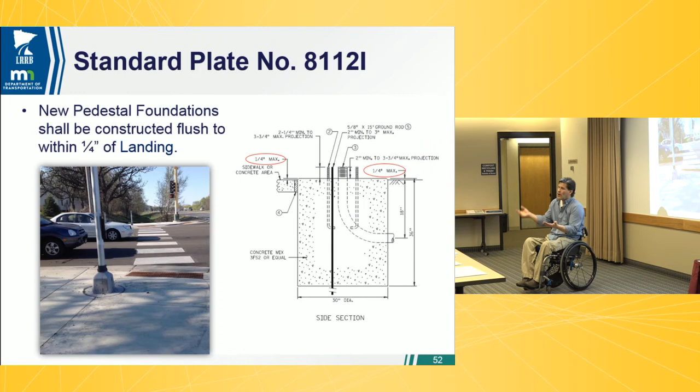So it was always supposed to be within a quarter inch flush with the walk. That rarely happened, but it was also supposed to be that way for ADA reasons, so it's flush with the walk. Now we're saying, yes, it's good for traffic, but also good for ADA. So start doing that sonotube trick I talked about: rough in your conduits, pour your walk, strike your sonotube off, and pour your foundation second. Again, you'll always get it flush when you use that method.

And that is what this picture is showing here. A flush installation works really good. This one, not as much. The signal contractor might not have known what we were building.

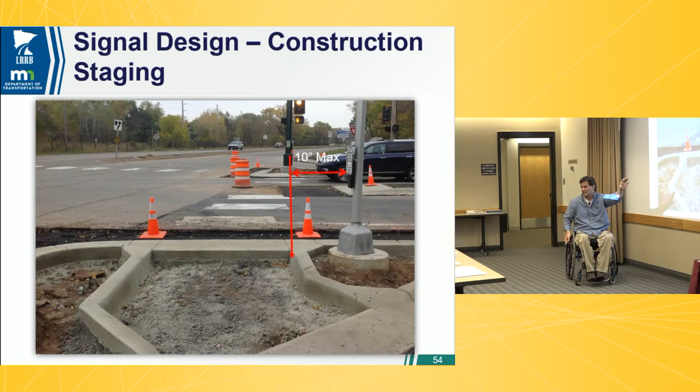We were building a cut-through here, and it doesn't even come close to that 10-inch reach requirement. But also, from the contractor's side, he had to keep this signal operational during construction just for vehicle phasing, so he sort of had to get this signal in here. He guessed wrong, and I think did a slight modification, but you kind of live with it, because how much do you rework? So we want to set ourselves up to be more successful.

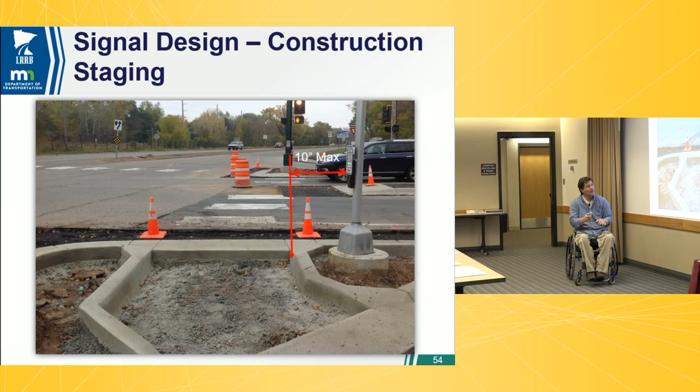So we are requiring contractors to have temporary type pedestals on donuts, to get those out of the equation for that week the quadrant is getting built. Build your quadrant correctly, then get rid of the temporary signal. So again, we should be putting that in our plan sets if we want our contractors to be more successful, as well as us.

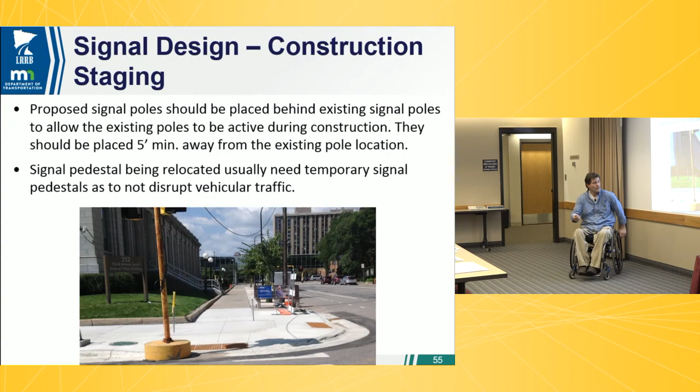So the last slide I have is talking about RRFBs. The interim approval did go away from these in December. It came back in March, so they're able to be installed again on MnDOT right away, actually in Minnesota right away—Minnesota got the approval.

I did forget to mention one thing. I said I was going to talk about Annie's politics. And remember that grooved intersection is the one Annie was at? In the video, you saw that she had APS out there, and so that wasn't really the problem. She could cross the main 4 legs of the intersection. Where her difficulties were, where she was losing her 2 canes in the cars, was actually at the free right.

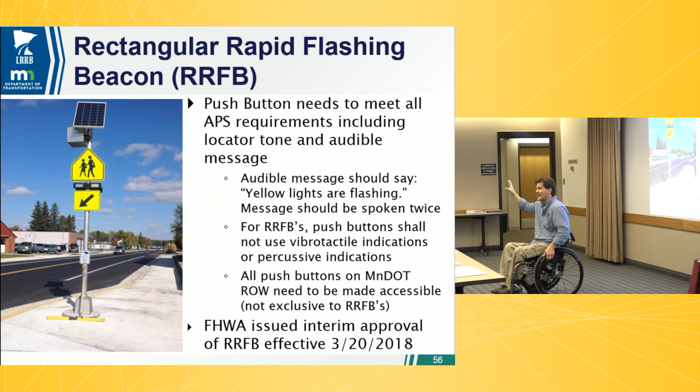But even it was interesting, our traffic folks only wanted us to do one lighted sign so it wouldn't interfere with the mainline traffic. And I was designing this, so I said, no, we're going to do 2. And if it's a problem, we'll deactivate 1. So we're looking for this lowest common denominator of anything that we can do.

But again, we're very worried about setting precedents. So even if this works well, is this going to mean we have to do this everywhere? And there are real costs to this, maintenance costs, construction costs. Really the interesting thing was, even when it came down to it, it wasn't really just the request from Annie that was enough, but there was actually 2 visually impaired users there and a couple kids with wheelchairs.

So, okay, that finally started to weight the scales where we could do some of this non-traditional, non-standard things. So, just kind of interesting, that's what the outside sees and how we play our things and all of our functional units on what we can and can't do and what we do or don't think is important. So, some of the politics of